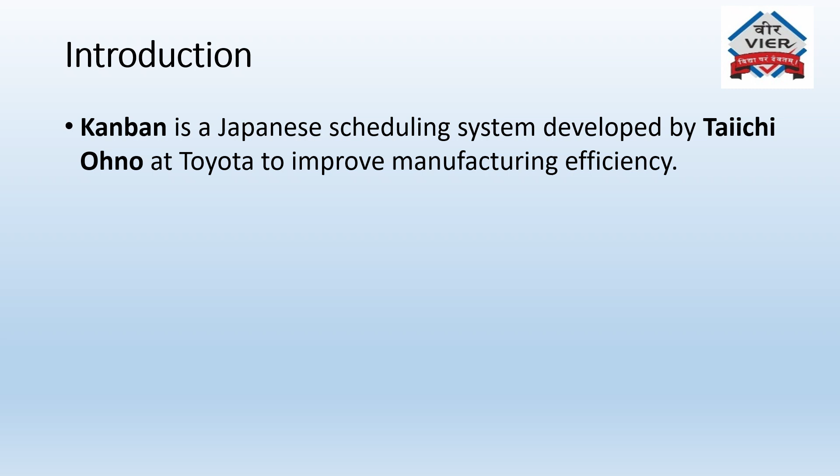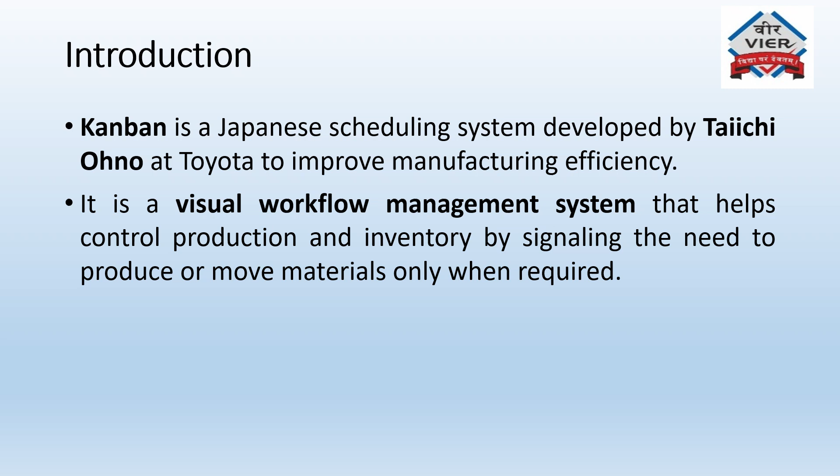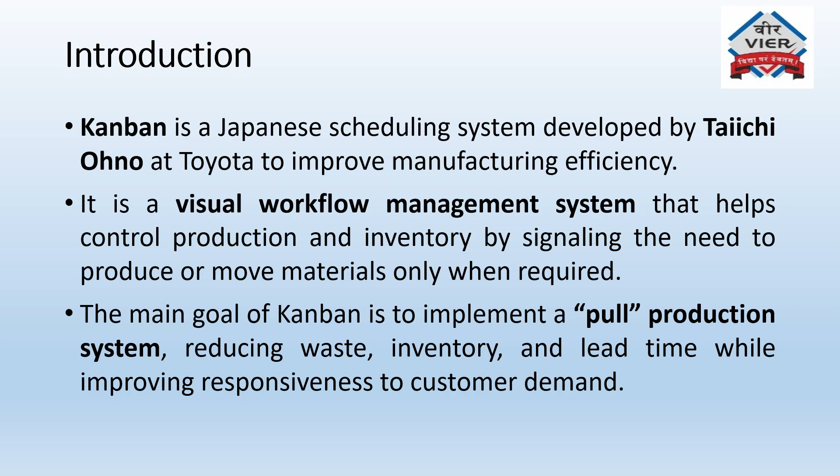So Kanban is basically a Japanese scheduling system developed by Taiichi Ohno at Toyota to improve manufacturing efficiency. It is a visual workflow management system that helps control production and inventory by signaling the need to produce or move materials only when required. It is a pull production system, meaning we only produce when it is demanded. So we can reduce waste, inventory and lead time while improving responsiveness to customer demand.

Beta Gears Limited is a medium scale company where this case study was carried out. Before implementing the Kanban system, they were facing different problems like excessive inventory on the shop floor, frequent production delays, long lead times between machining and assembly, poor visibility of material status, and unbalanced production flow. So they decided to implement the Kanban system.

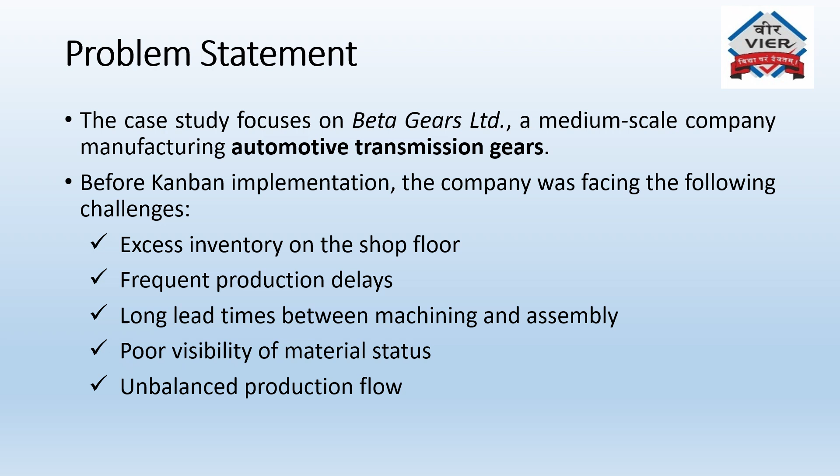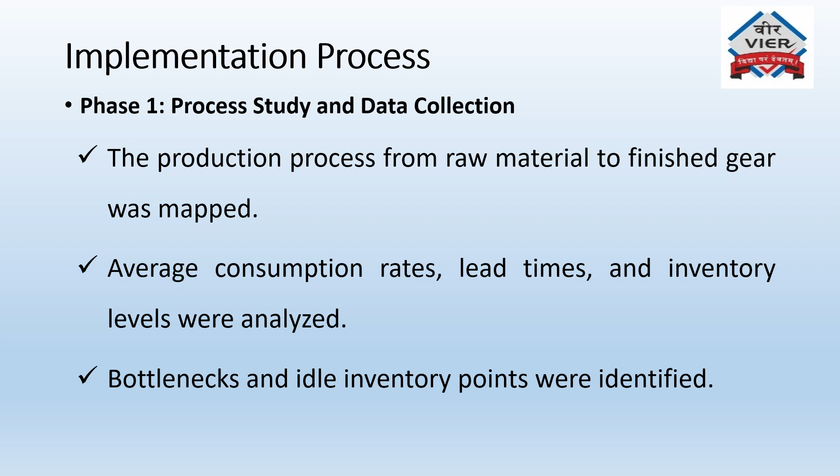The first stage is process study and data collection. In this, the production process from raw material to finished gear was mapped. Average consumption rates, lead times and inventory levels were analyzed. Bottlenecks and idle inventory points were also identified.

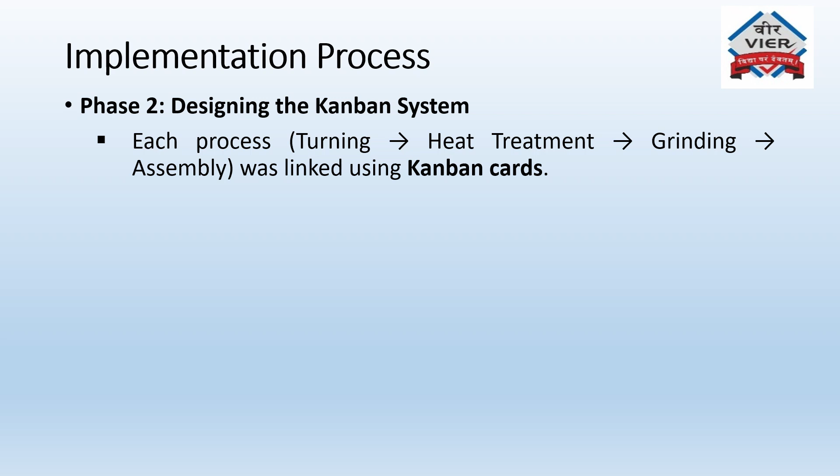In the next phase, which is designing the Kanban system, each process from turning to heat treatment to grinding to assembly was linked using Kanban cards. A two bin system was introduced for small components like washers, nuts and spacers. Each bin or container carried a Kanban card containing details such as part number, quantity per container, source and destination, and process details.

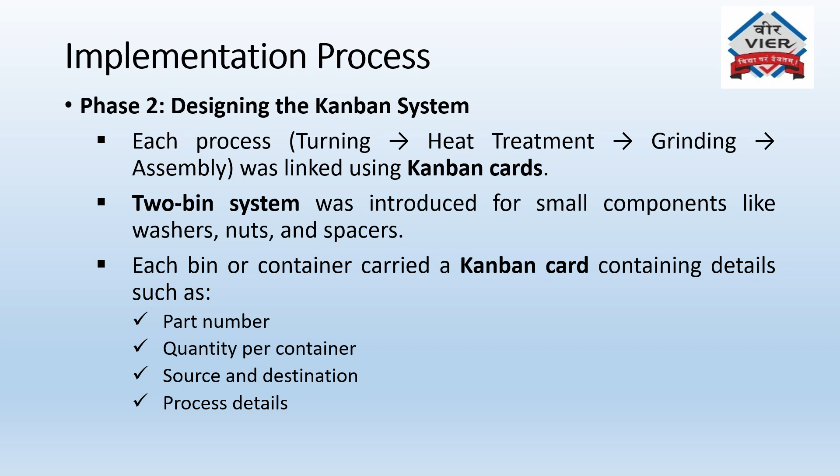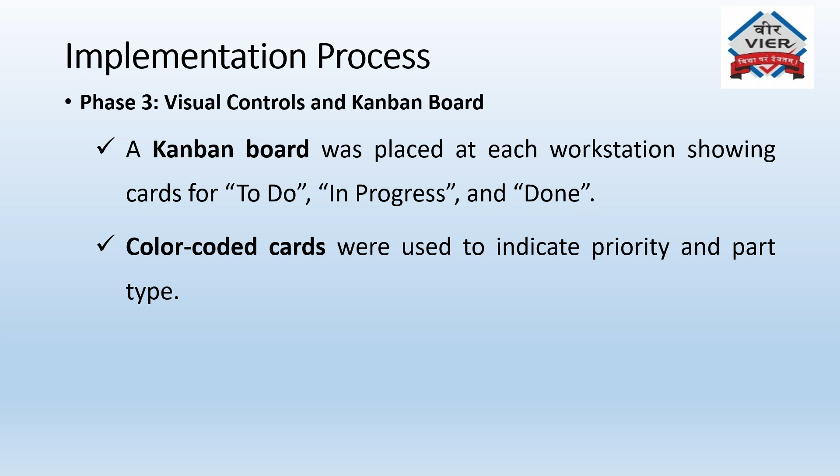In phase 3, which is visual controls and Kanban board, a Kanban board was placed at each workstation showing cards like to do, in progress and done. Color-coded cards were also used to indicate the priority and part type. Supervisors monitored the board daily to ensure balanced production.

In the next phase, which is training and pilot implementation, workers and supervisors were trained on the Kanban concept and rules. A pilot run was conducted in the gear grinding section. Adjustments were made to container quantities and reorder levels based on real-time data.

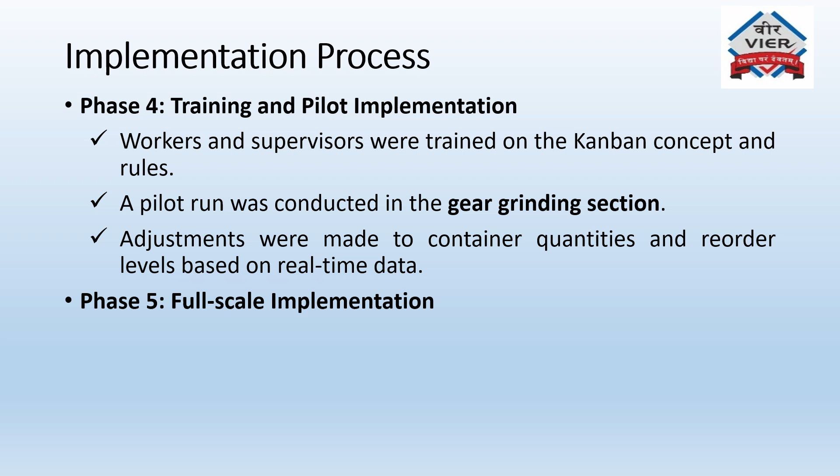In the last phase, which is full-scale implementation, the system was expanded to all sections after successful pilot testing. Periodic reviews and audits were carried out to ensure smooth functioning.

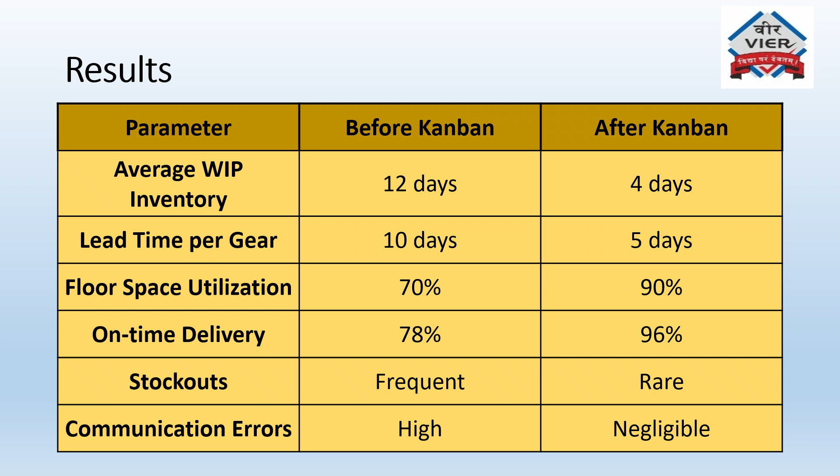So, by implementing the Kanban system, the organization was able to get different benefits or successes like this. Average work-in-process inventory was reduced from 12 days to 4 days. Lead time per gear was reduced from 10 days to 5 days. Floor space utilization increased from 70% to 90%. On-time delivery increased from 78% to 96%. Stock outs reduced from frequent to rare, and communication errors were also reduced from high to negligible.

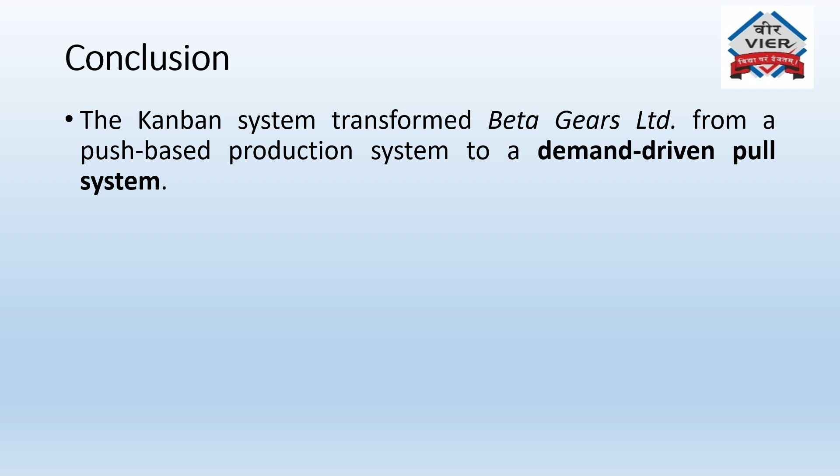So based on the results, we can conclude that the Kanban system transformed Beta Gears Limited from a push-based production system to a demand-driven pull system. The company experienced significant improvements in inventory control, lead time, and productivity. So we can say that Kanban not only enhanced operational efficiency but also built a culture of discipline, teamwork, and continuous improvement, aligning with lean manufacturing practices.